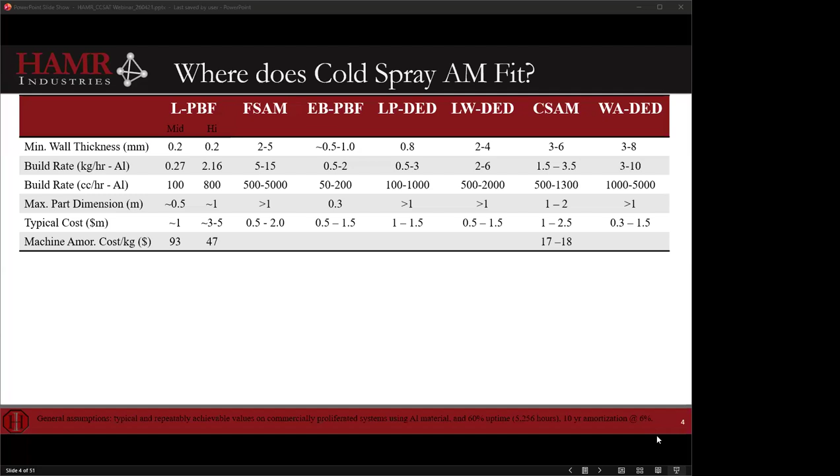So that's going to be the first half of today's talk. Where does it fit? What are the things it's good at? What kind of properties does it have? What are the economics? What are the challenges? Where do we need more development? Where do we need more research? Where does it fall short?

And then the second half of the talk is going to be about more novel applications. Not only does cold spray have a role, we believe, in that additive tool belt, but we also believe that it's not only a specific tool, but a unique tool. It can do a lot of other things that are either challenging or maybe not even possible with some of the other additive modalities. So when we look at the types of materials it can process - refractories, cermets and composites - and unique ways of operating, like cladding, 3D grading, functionally grading, hybrid AM, and expeditionary, that's when we see cold spray starts to really shine.

And the only other modality that's really comparable to it is potentially powder DED, in terms of having this really large degree of flexibility.

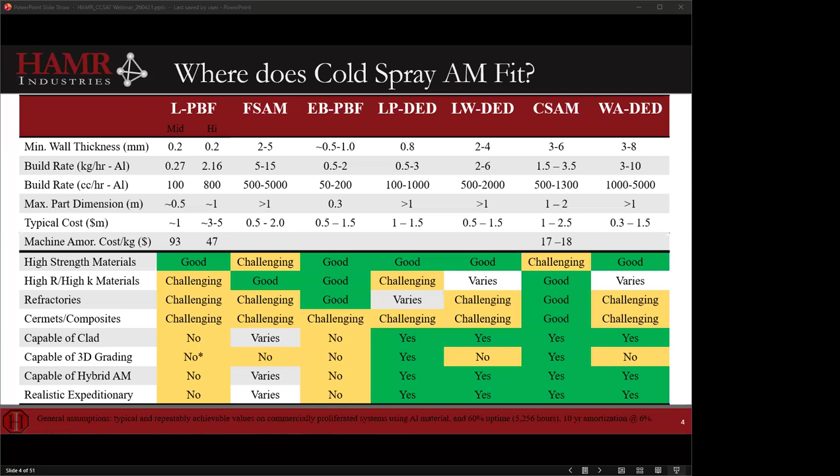So drilling down into it more, where does it fit? Consolidating that eye chart into a digestible table here. Feature size - we're looking at parts that have minimum feature sizes, ideally greater than 6 millimeters, to reduce the amount of machining we need to do. Component sizes - it can do any component size, but where our bang for the buck is when we start to get to intermediate to large and even extra large components.

The material is flexible. This is an advantage we'll talk about throughout the discussion today, but the materials that cold spray can do are traditional manufacturing alloys. So we don't have to do a material swap. When we look at qualification and the challenges that are there, having a material swap and a process swap can sometimes be doubling your difficulty.

And it's also amenable to non-standard materials, and the requirements for those materials are also flexible. So in terms of particle size, morphology, shape - in cold spray we in fact sometimes like a powder that is not spherical. So water atomized, more economical powders. We've utilized mechanical powders.

Our neighbors, Metal Powder Works, generate an angular powder, and we've used that to good success. So the material requirements are flexible. The timeline is fast - that's the timeline from when you get the part in till when you can print. It's easy to slice, so we can go from CAD to part very quickly, and we can print very quickly in cold spray additive.

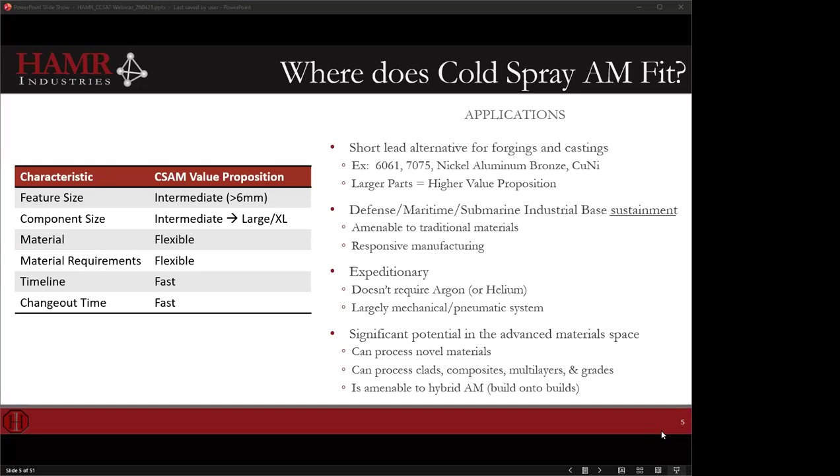And then there's significant potential in the advanced material space. It can process some really novel materials and clads, composites, gradients, and we'll get into this later in the talk. So from the sense of where it fits, we can start to see.

But the question that's kind of first on a lot of people's mind is, what are the economics in the process? Can you actually make a part that we can buy? Typically, when we talk additive, the first part of the conversation is, well, you're going to pay for it.

And a lot of that comes from being first centered around powder bed fusion. We like powder bed fusion, we use it, but in some ways it's challenged the AM community, because the focus was always complexity is free, and additive is only good for complex parts, not for castings or boring parts. It has to be really complex to make sense, and we're not worried about how long it takes - we're just worried about the complexity of the part. And that's because those initial machines and development in the community were slow to process. They were hard to process, they were expensive, and you weren't able to make an economical part.

That's not really true, so that's what I want to show here, especially for cold spray. This is a broad strokes example we've done, similar to something we've quoted out - a conical geometry somewhere in the 2 to 3 foot range in terms of length. We're looking at what a first article cost looks like, what goes into that cost, and then moving into LRIP and production type costs. For a first article, these costs are all unloaded, just raw costs for the part plus operating or facilities costs. There's NRE like every other process, and the first article landed at around 30K for a 2-foot long part, comparable to a relatively moderate sized forging. This would be for aluminum 6061.

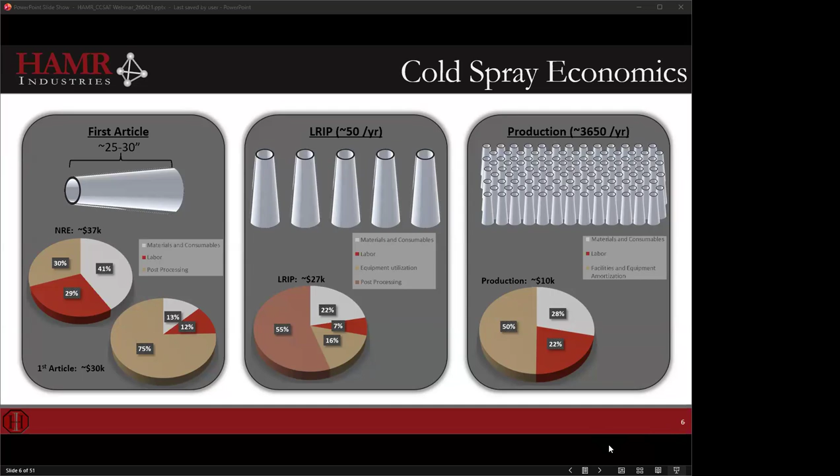So the answer to can it be economic is yes. It's a fast process, it scales well. First articles to LRIP can usually be done on one machine, because one machine can process quickly, and that also gives the user the ability to scale up in a useful and sustainable manner.

Continuing to look at costs, rather than reinvent the wheel here, we borrowed this from Barnes Global Advisors. They have a designing for AM workbook through some of their AM workshops, and this one looks at cost comparison by AM method. It gives a sense of normalized cost and what goes into the major costs for each modality.

When we look at cold spray AM, we see that the printing itself is really not the major cost driver - it's the feedstock, and we would agree with that. The feedstock really starts to be the major driver. And especially at low rate, post-processing is one of the bigger costs. We're near net shape, but we're not fine featured.

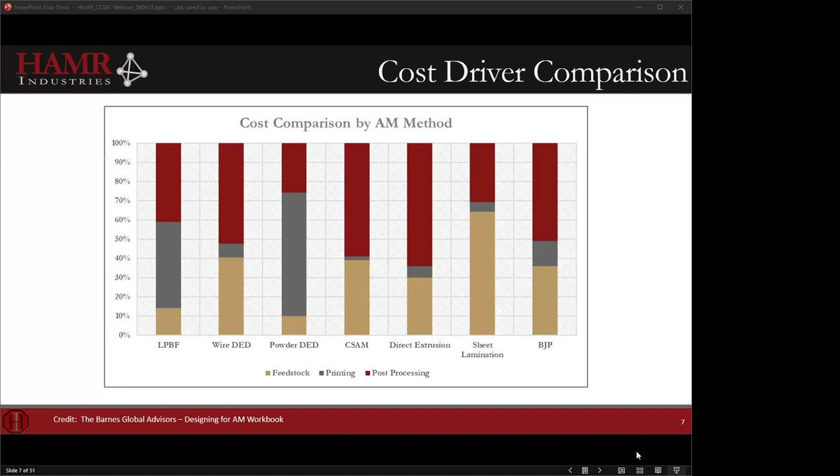So this is the drawback - we can make things quickly, but we do have to machine them. We're going to print in a green state, heat treat, and then machine. The fact that we heat treat and machine each part certainly adds cost, so this can make it sort of challenging for those prototypes and that LRIP. But once those costs are internalized, or once we productize and have a single setup and we're just chewing through that setup on the machining side or the heat treat side, that brings those post-process costs down dramatically, and then the process can really shine in terms of the economics.

So first off, there's really been minimal funding in this technology to date. Relative to the other additive modalities, not only has cold spray been around for a much shorter time, but there's been tens of millions of dollars dedicated to powder bed fusion and wire arc and the other modalities. Cold spray, that is not at all the case. And yet with a few million, among the entire cold spray community, there's already a number of materials meeting and exceeding the casting and forging standards, some developed on IRAD by companies. So I think that's a really encouraging spot for the process to be in.

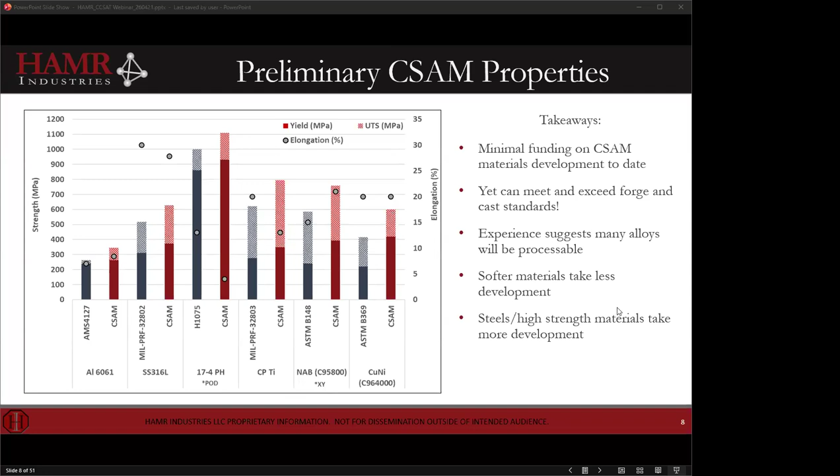17-4, really high strength material that's been able to be made, and CP Ti also looks pretty good. So there are some caveats. Harder materials, tougher materials are more challenging. That's definitely not the strength of cold spray. So if you want a really high strength steel, cold spray may not be your best bet, or at least looking at it for a more traditional approach. But properties, we can make them.

It's economic. So why is it not proliferated? What are the challenges, right? We don't want to come across as if this is the best thing since sliced bread, that everything is rainbows and butterflies. There are certainly challenges, a lot of them mimic what we see in the other AM modalities. The first one to highlight, the simplest one, is just build efficiency.

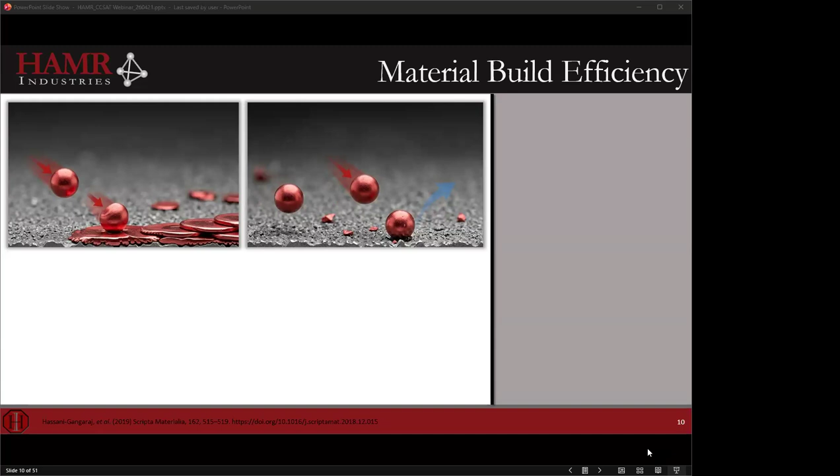So there's a fun little AI image that sort of approximates the cold spray splat phenomena. As the particle comes in, impacts the surface, splats, deforms, we make our part. If our material is too hard, too high strength, too brittle, it can come in and break, shatter, or it can come in and rebound. And that leads to a low deposition efficiency. At best case, at worst case, we just get no buildup. So if we have a low deposition efficiency, if most of our material gets bounced off or breaks, that means it's a very expensive process now.

Unlike powder bed fusion and some of the other modalities, we're not able to reuse our powder at this stage. So whatever we lose is lost forever.

And there's a few ways to think about this and a few ways to kind of assess what the likelihood or strengths of what you're going to do are. So we see that there's something called a critical velocity in cold spray, and that's basically a velocity where we go from the reflection on the right to the splat on the left. And we see that that is a function of the material properties. It varies by alloy system, and we have to achieve some velocity in the particle. That velocity is dictated by the temperature, pressure of the gas, density of the particle, and so forth.

And then within an alloy system, we see that as we increase the strength of the alloy, going here from pure aluminum to aluminum 7075, that increases the V crit, or the V crit ratio. So how fast do we need to get the particles? Ultimately, we can relate that - it's arguable in the literature - to something like the spall strength of the material and the bulk sound velocity, that's one approach.

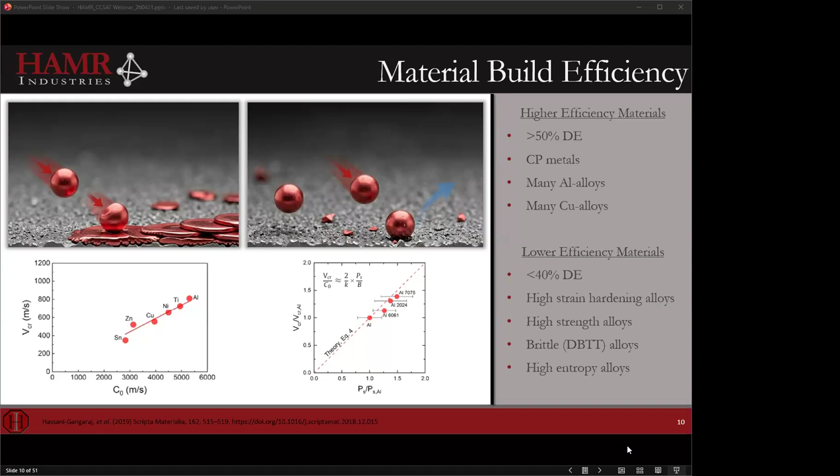Lower efficiency materials, where we're thinking less than 40% deposition efficiency, are really high strain hardening alloys. You can imagine as that particle tries to deform, it's going to be a challenge. High strength alloys, brittle alloys—things that are brittle at low temperature. Cold spray is not a very high temperature process, so the particles don't stay that warm for that long. High entropy alloys tend to have very high spall strengths, so they tend to be a little more challenging to deposit.

The next issue that can challenge cold spray is clogging. We have different examples of clogging here—you can have clogging in a barrel, clogging in an injector, clogging in your powder feeder funnel, clogging in your nozzle. There's metal powder flowing, so there's a high probability that there's somewhere it can clog. Since we are primarily pneumatically driven, that is the biggest in situ process challenge we face in cold spray.

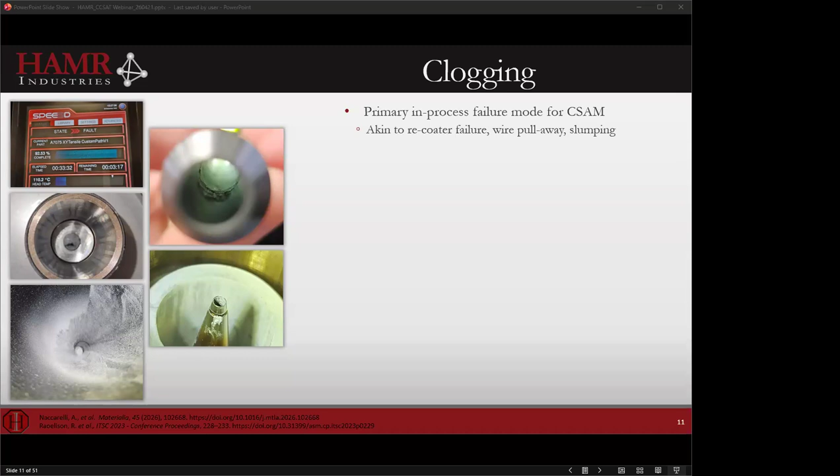To liken this to something in the other AM modalities, it's kind of like a recoater failure. Everything can be going great, and then you have a recoater failure, or wire pull away, or slumping. When that happens, you have to go back and double check: was everything done correctly? Are our supports generated correctly? Are our feeds and speeds correct? In the case of cold spray, it often comes back to the powder—is the powder correct? Was it handled correctly? Do we have the right particle size, the right moisture content, etc.?

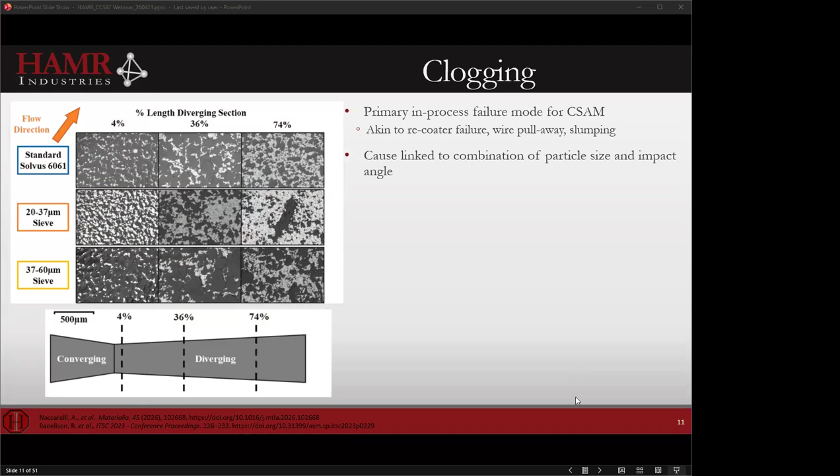This cause is based on some work done by Penn State and Tony Naccarelli. It's been linked to a combination of particle size and impact angle, where we can see certain particle sizes and impact angles tend to clog.

Fortunately, there are a couple of solutions. One that's been more broadly adopted is the cooled nozzle—either air cooling or some sort of fluid cooling—which helps mitigate particle adhesion in the nozzle and the buildup of clogs. There's also utilization of ceramic materials, moving from metals and PBI and cermets to full ceramic materials like silicon carbide and silicon nitride—things that are covalently bonded that don't want to stick to metal. You can think of it as: can we deposit on it? If the answer is no, that probably makes a good barrel material.

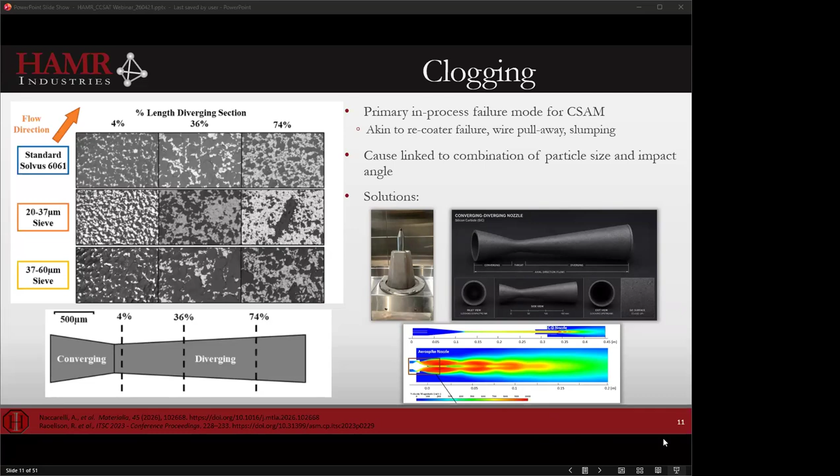The last way the community's been looking at solving this, and maybe the most novel approach, is changing our nozzle design. If you're familiar with rockets and space, aerospike nozzles are a novel approach a lot of people have been trying to get to work. We can take that into cold spray, and it allows us to inject our powder past the throat of the nozzle into a region where the fluid is a little cooler, and more importantly, into a region where it's not likely to impact anything, because it's past the converging section or past any wall it could hit. So there are solutions—it's a problem that's ongoing, something that's monitored, and something that needs to be designed around.

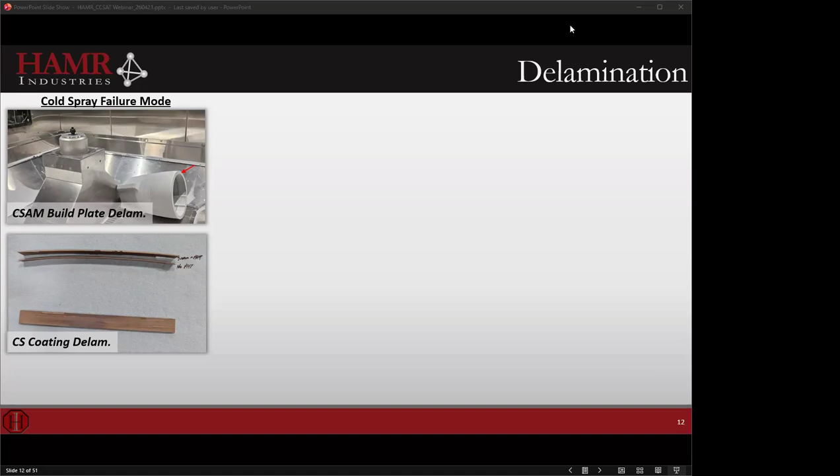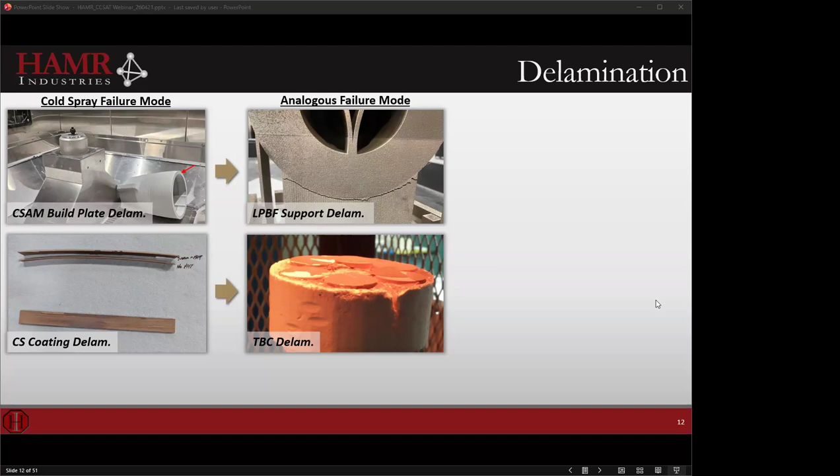Fortunately, we can borrow from what's known in the literature—there are analogous failure modes. In additive manufacturing, there's support failure, failure from the build plate, and a lot of solutions that have been simulated, modeled, and designed. Likewise, for coating delamination, this is a chief concern in the thermal spray world. If we look at thermal barrier coatings, the primary function is how to avoid delamination in a system that's prone to it. So a lot of these challenges have been worked on previous to cold spray.

It's not new, so we can borrow some of those solutions. In the case of the top, we can look at something like a raft or a skirt, borrowing from what we do on our FDM benchtop printers, and it works. It's certainly a viable approach, and we can change our DFAM, reduce our stress risers, look at our contact area and contact patches, and use that to ensure we have adhesion.

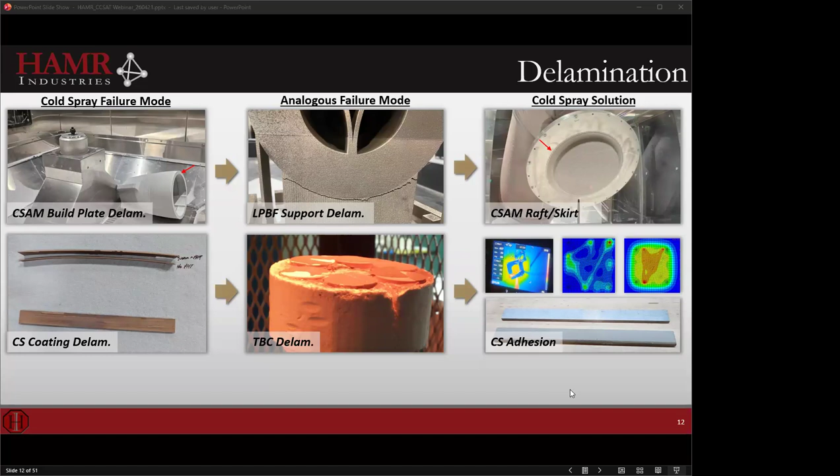From the coating side, a lot of it comes down to thermal input and managing thermal expansion and mismatch stresses. You can see from left to right that we're able to get these coatings to adhere. So fundamentally, much of this comes down to management of heat input, stiffness, and residual stress, similar to what we do elsewhere. It's a similar challenge that we have to face in cold spray.

It's a good segue to overall residual stress management. Every additive, every manufacturing modality has to manage residual stresses. There's stress risers and thick-to-thin transitions. It's a challenge in castings, forgings, and it's a challenge in additive.

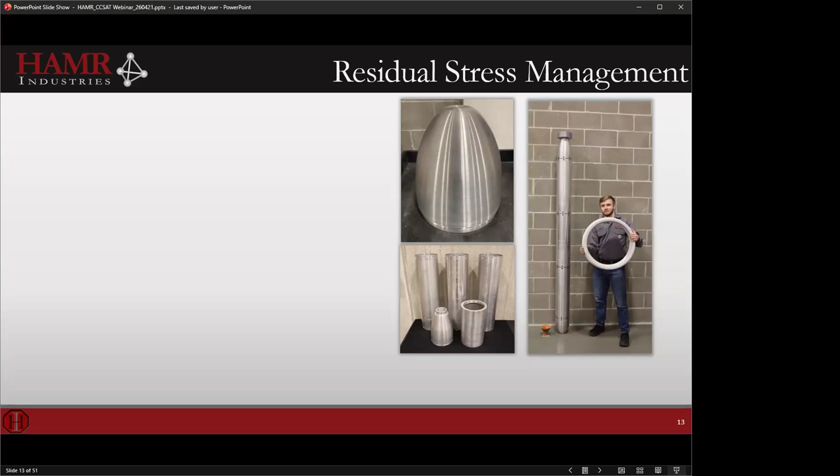On the right here, we've shown that we can make large parts. We can do it repeatedly and reliably. Those are 6 3/4 diameter on the bottom, several feet long, and then on top that's in the realm of around 13 inches and about 1.5 to 2 feet. Then the part that Jake is holding—Jake's always the person who ends up taking the pictures—is between 20 and 24 inches. So it can make large parts, and we can do that successfully, and we can manage the stresses.

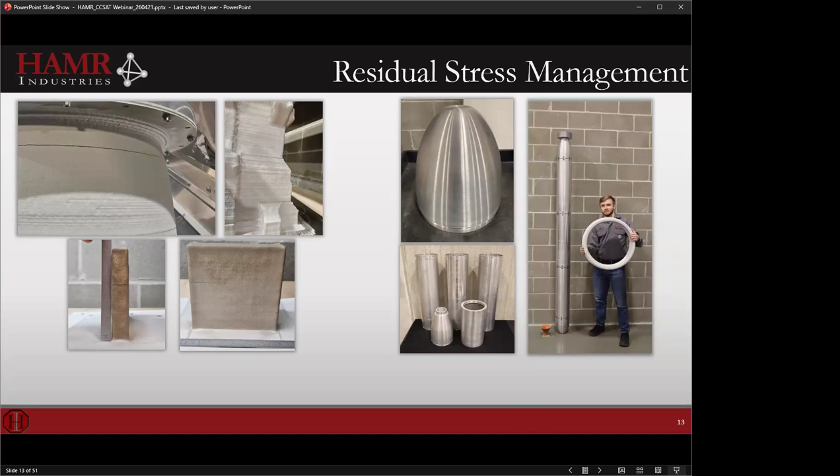But there are times when we don't manage the stresses, or when parts fail. Cracking is a challenge in cold spray, just like it's a challenge in the other modalities. It's something we have to address and something we're working on. Ultimately, we want to take it from the left to the right—move from geometries and setups that tend to have cracking to setups that don't. And we know that we can, because we've done it.

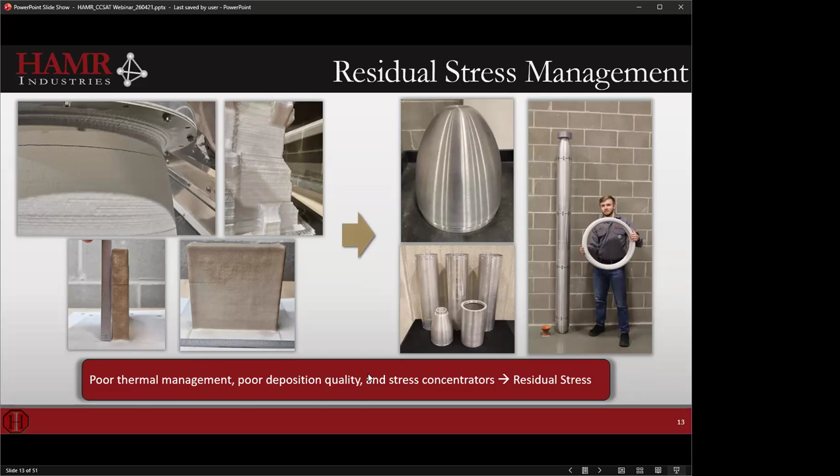And how is on this next slide. This is where I think there's a lot of focus from the community and a lot of room for work: assessing, modifying, and accommodating the residual stress in cold spray.

So there's sort of four knobs that I think we can turn: green body strength, DFAM—designed for AM—feedstock optimization, and thermal management.

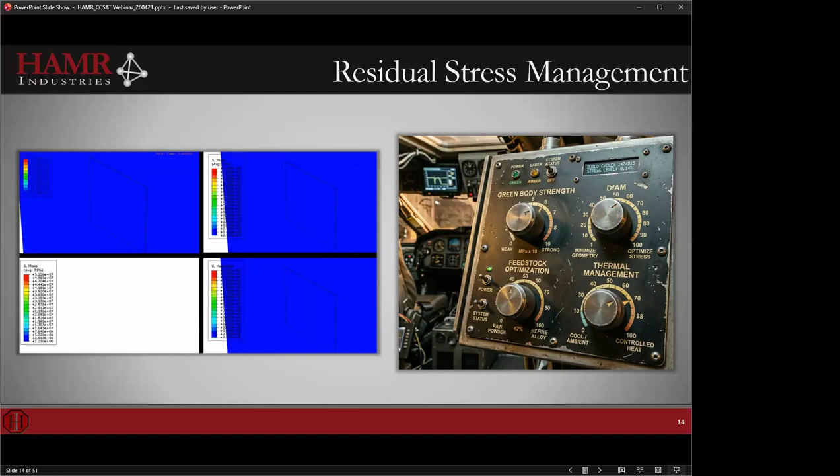From the green body strength perspective, I mentioned earlier in CSAM it's ideal to spray with air, because when you spray with air you have the most economical process. The downside of spraying with air is, unlike spraying with helium at really high pressures and temperatures and getting something that's ductile off the bat, we have something that's brittle. There's effectively no elongation. So if the stress exceeds whatever the UTS is of your green body, you will have cracking. So what can we do to modify the green body strength?

Turning that knob means changing process variables, which also relates to feedstock. Getting the optimal feedstock for the process to maximize your ductility and strength in the green body, while minimizing your need to go to really aggressive energies, is an area we've focused heavily on.

DFAM, similar to all the other processes—looking at our radii, looking at how our tool path is affected so that we don't build in defects with our tool path—is an area of focus for cold spray.

And then thermal management. Most of these stresses are thermally driven. If we simulate it, we see that in simulation and we see that in practice. The same material, different geometries—we know they have the same amount of stress from peening because we process them at the same conditions. We see some things crack and some don't, and it's primarily thermally driven.

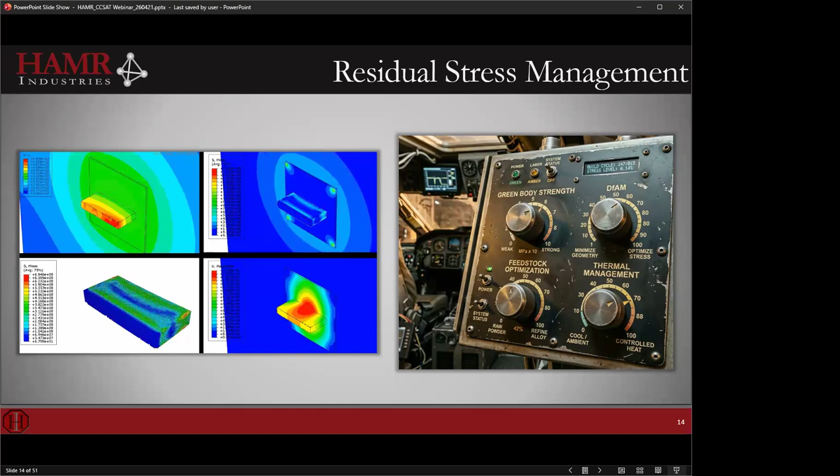So the second part is going to be a little bit of a left-hand turn, but now I want to look at - we've discussed where cold spray is good, where it fits, where it's challenged, and where we need improvement. Why should we make that investment? Do we need just another tool in the tool belt that can do certain materials, certain sizes, and certain shapes economically? Is that useful? I hope to illustrate why the answer to that is a resounding yes.

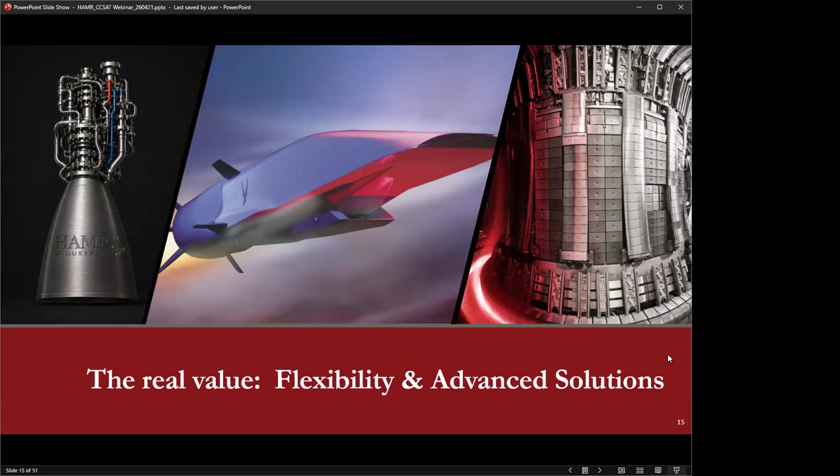So the real value is in flexibility and advanced solutions. At the top, these are some high-end advanced applications in fusion, in propulsion, in hypersonics, and I think cold spray has a lot of value here.

So the first value statement I think needs to be brought up is flexibility of cold spray. Cold spray - one system of cold spray can be used additively. It can be used as a coating. It can be used as a repair. There's not many other technologies, and there's really no other AM technology that I would say is as flexible as cold spray.

I think the closest thing is maybe powder DED in terms of being able to repair complex parts, clad, and coat. But from the expeditionary standpoint, that's where cold spray really tends to shine - one system can do a lot of different jobs.

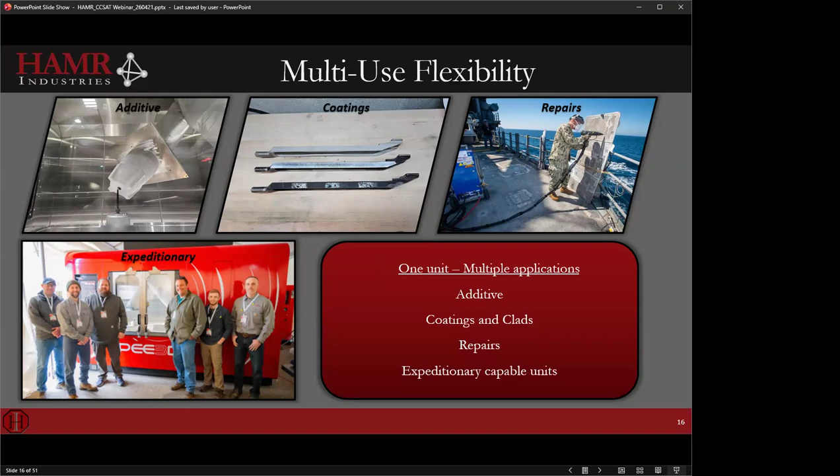So from an investment standpoint, both commercially, but also from the defense industrial base and from the government, if you invest in this one technology, you're getting a lot of return on that investment. It can do a lot of different things. So a dollar goes a lot further for this technology, both as users and as customers.

The next part that I think is worth highlighting is hybrid AM. In our shop, like I mentioned previously, we have a FormAlloy DED system. We've got a variety of other AM modalities - there's powder bed fusion, there's E-beam and laser in the campus. When we look at cold spray, there's a unique ability to tie it and marry it to other manufacturing methods.

But it allows cold spray to work with another type of manufacturing method. There's been some really interesting discussions on cold spray in forgings - can we forge a simple component and then add complexity to it with cold spray? We know from previous slides it can hit the right properties. So can we help buy down the time of a forging by doing the complex operations with cold spray?

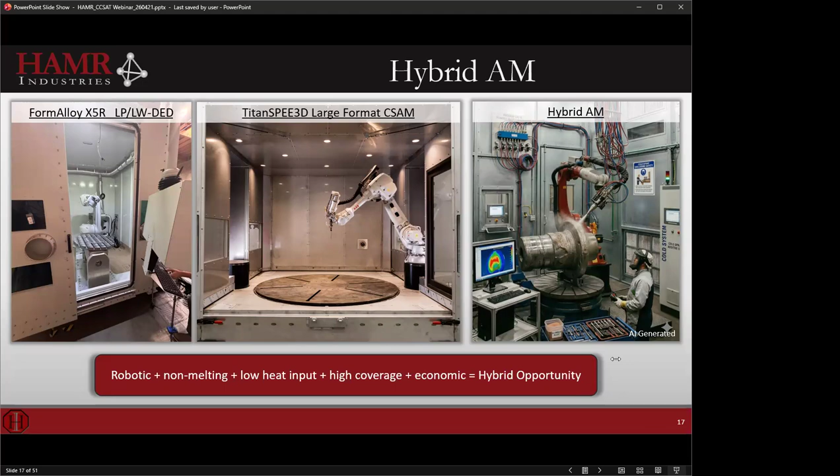It's a technique that is solid state, so we don't have to worry as much about the interaction of what we're spraying with what we're spraying onto. So there's a lot of opportunity for hybrid AM, doing multi-material, doing complex materials.

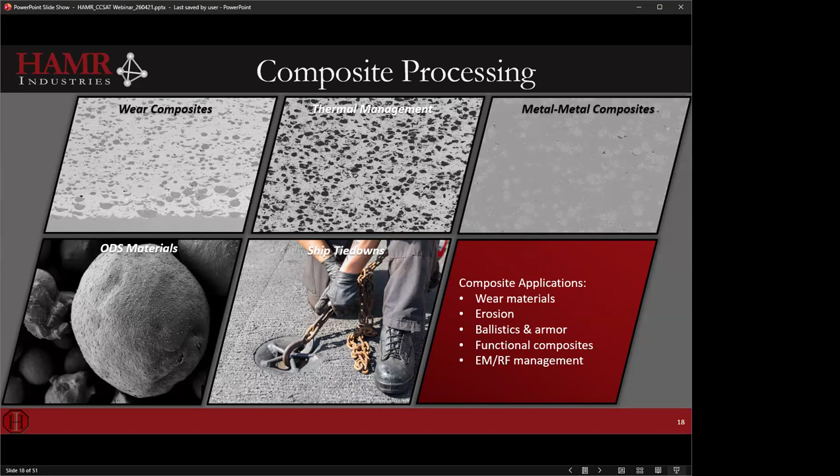So the applications for composites include wear materials, erosion, ballistics and armor as a great area, as well as functional composites where we're looking at using the properties of two dissimilar materials. EM and RF management, I think, is going to be a growing place for cold spray additive.

Continuing on process, composite processing and reactive metallurgy is a very unique place that cold spray sits and can leverage. If we treat cold spray as a near net shape powder metallurgy process, and look at it less through the additive lens and more through the powder metallurgy lens, then you can really do some cool things.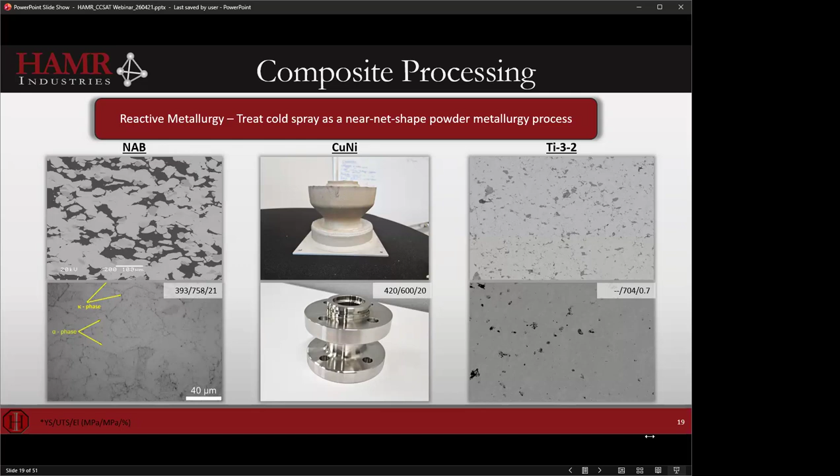I have three examples here of different materials that have been processed, where a constituent blend, whether master alloy, CP elements, or somewhere in between, is sprayed and then reacted into the final alloy. You see examples of NAB, copper-nickel, and grade 9 titanium or Ti-3-2, and we can achieve comparable cast and wrought properties. It's a unique way, and this affords us a mechanism of manufacturing alloys that may not be traditionally manufacturable in additive or traditionally manufacturable in cold spray. I think this is a very unique way that cold spray opens up to process materials.

Cold spray can build off of any part in any orientation. We aren't worried about melt pools, we aren't worried about gravity or solidification effects. So we can spray in any direction, and we can control what material is where because we're using powder feeding. That allows us to control what material goes where on the part and when. Cold spray is really uniquely positioned, along with powder bed and powder DED, as one of the only capabilities that allows you to control what material goes where and when, which allows you to do full, true three-dimensional functional grading.

Especially with cold spray, we can do this without reacting the materials. So we can functionally grade things that maybe we typically couldn't melt process because we'd form a lot of deleterious phases. We can spray that in cold spray and create some really unique parts for unique applications. You could open your mind to something that might need high temperature on one side and lightweight on the other, or a radiation environment on one side but low cost on the other, and how do we get these things to stick together?